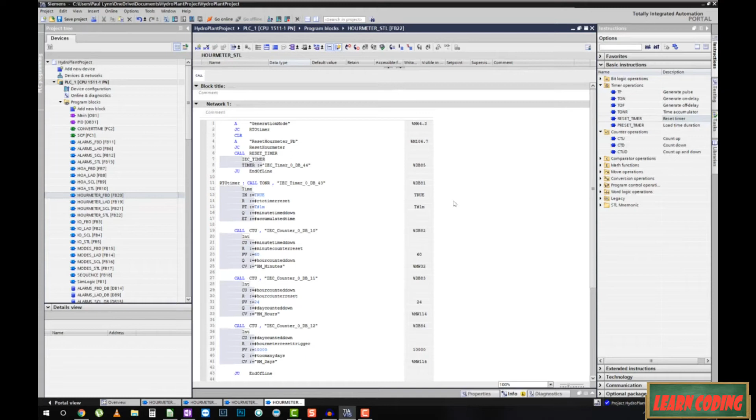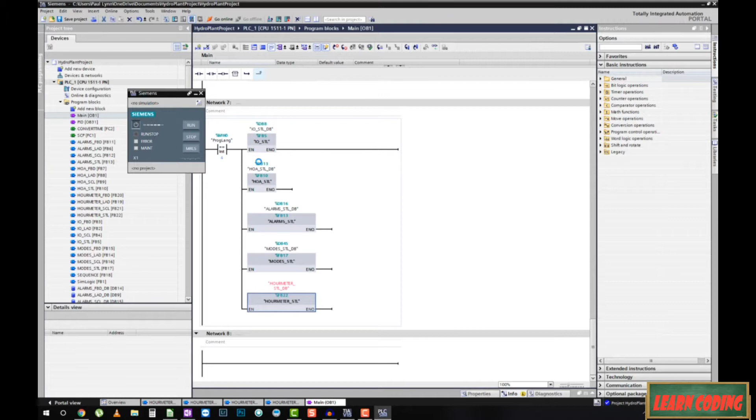First thing we need to do is go into main, and we need to simulate this. Let's start this on simulate and see if it even compiles. I'm betting it will, though. This is all simple logic, it's not hard stuff, it's really just wrapping your brain around the process. But these are the same controls we used in every other program, so it's not like we've got really tricky stuff going on, right?

Let's select where this thing's supposed to be. Sometimes it makes me search for it. Oh, come on, don't act like there's not a simulator right there in front of me. I know it's there, you're not going to convince me otherwise. All right, compile, compile, compile. Come on, you love my programming, you know it.

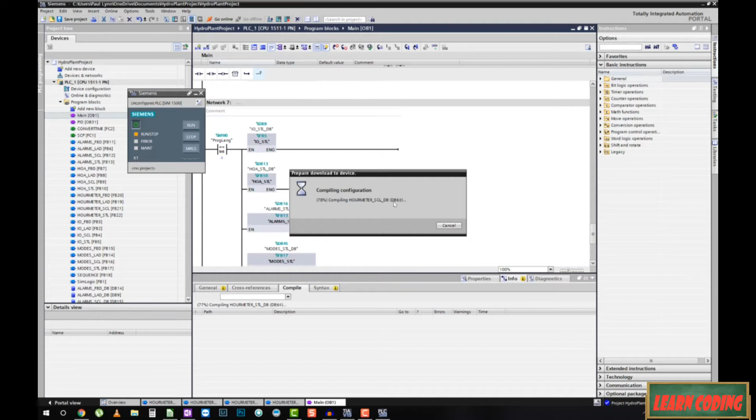My code is good, it's the best you've ever seen. Come on, show me the money. Man, do I really have that much code in here that it takes 20 minutes to compile the thing? Check, check, oh look at that. 4 hour meters coded and it compiles on first go. Well, will you look at that. Hey, I have at least learned to program for this course. I don't know if you did or not, but I at least learned how to program.

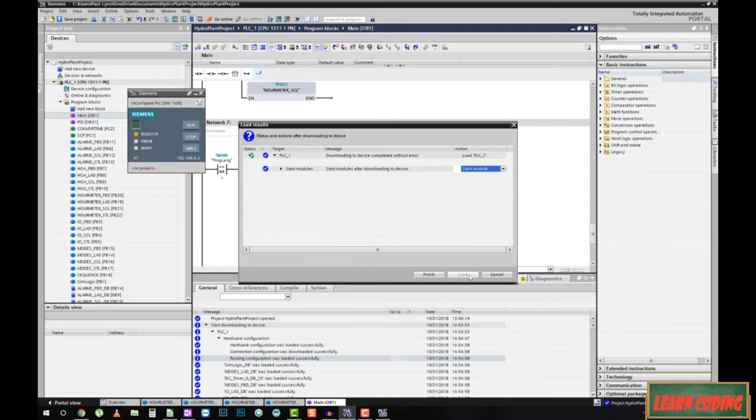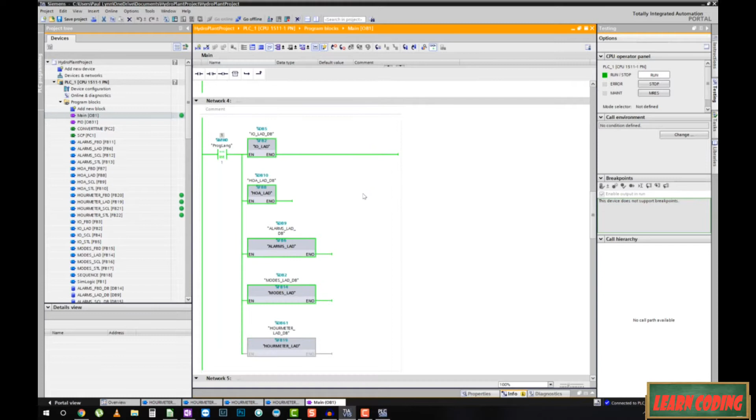Let's start that module, get on in there. Okay, so we're in main, and let's throw this thing into monitoring. Get rid of that junk down there and make sure that we're in ladders. Why, yes we are, how convenient.

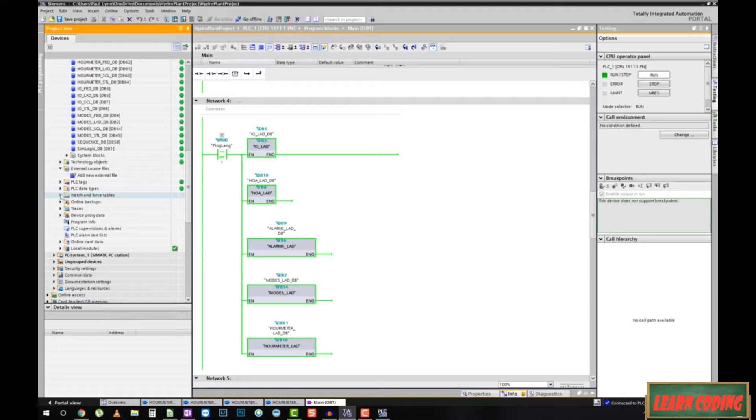Let's go into our watch table. I hate to do it, but it's one place where we can see everything all at once. And let's pull that guy up. We were looking at a whole bunch of junk when we were going through sequence. We're not going to look at as much junk, but we're still going to look at probably a lot of junk. So let's delete all that.

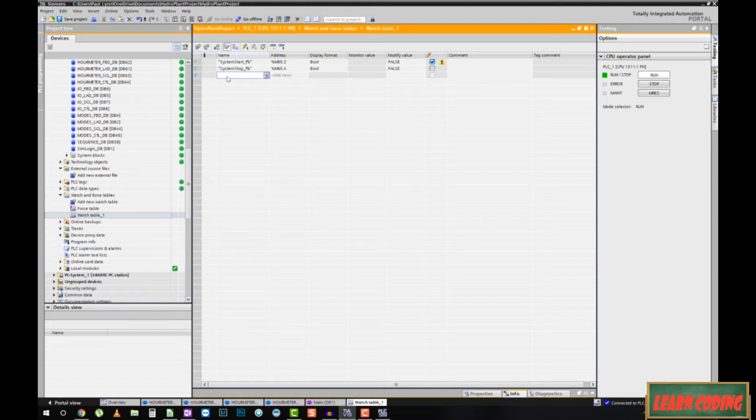Boy, is it really taking that long to just delete some stuff from a watch table? I don't want to sound like a cynic who's just got it in for Siemens software, but this stuff could really use some optimization.

Sorry. Okay, we want to check for idle mode. We want to check for warm-up mode, generation mode, cool down mode, and fault mode.

And let's go ahead and go online. So we can already see that we're in fault mode. That's a real bummer, and it's probably because our e-stop is off. Yes, it is. So we're going to need an alarm reset to deal with that. And for starters, let's go ahead and set our e-stop.

So let's send that value in. Done, get me out of that. And our alarm reset, let's go ahead and reset that alarm. Done. And set that back to false.

Okay, my finger's off the button. E-stop is on, we still have a fault. Let me guess, I've got to go through and set all my freaking settings and everything to get things running again. Well, that's hardly exciting. But what are you going to do?

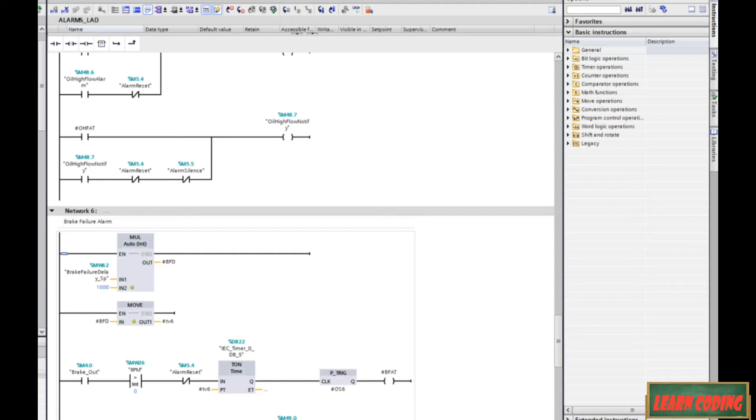Actually, what am I going to do? I could force this thing into generate mode, maybe. Let's see if that works. That's kind of a cheap way to test it, but I'd really rather not go and just set this whole thing up again. So, generation mode and true. Let's just see if I can force that. Good, okay, I'm in generation mode as far as our hour meter cares.

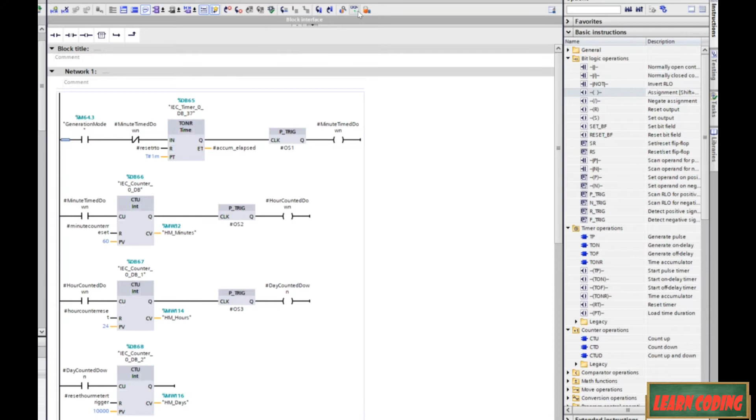And let's just delete all the rest of this, it can be in whatever error mode it wants. I'm going to look for hour meter minutes, hour meter hours, and hour meter days. All of those are 0, but I would expect that somewhere in some logic right in here, there are some seconds being accumulated. So let's come and check and look at that.

36, 37, we are accumulating seconds. And we should see those start to pop up as minutes here in another 14 seconds, and then we should see those start to pop up as days and everything else. So yay for that. And I'm going to jump over into my watch table just to see. Sure enough, we've got 1 minute there.

And I'm going to go ahead and push, let's see, I'm going to push 59 minutes into here, and I'm going to push 23 hours into here. So let's push those values.

And now, why didn't those values go when I tried to push them? That's really bananas. Oh, probably because the counters are managing those, so it won't let me push them in through here. Okay, that's fine. Let's go back into our hour meter.

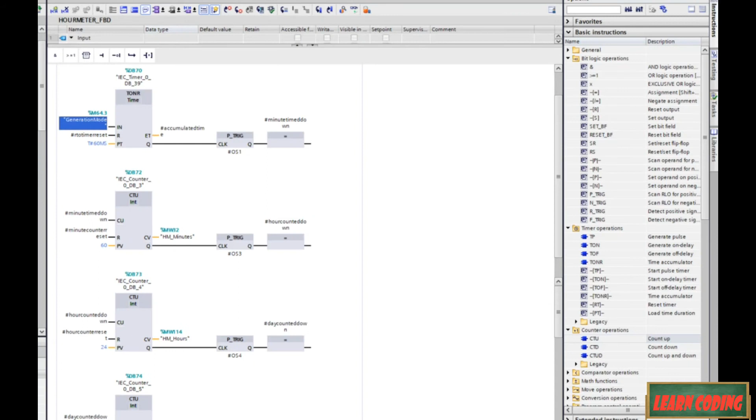Man, where did that thing go? I was just looking at it. Here it is. No? Fine, let's go the hard way. Let's click it over here.

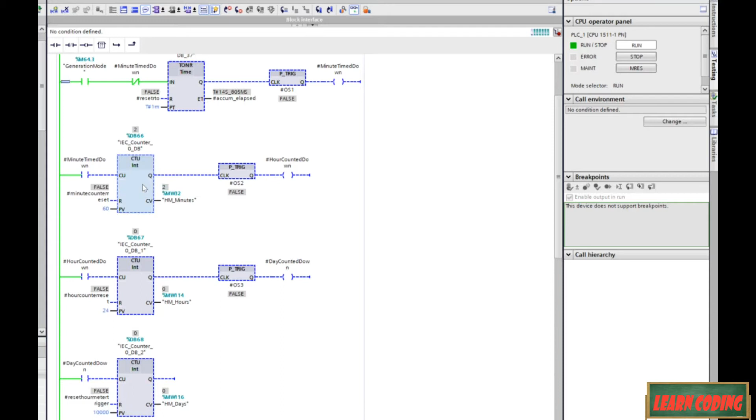Okay, so now we're back in there, and I guess there's not a way to cheat the hour meter, so we're just going to have to trust that if this counter is working and we use the exact same logic on the rest of them, that stuff's going to work as well.

So in that case, I'm just going to go ahead and check and see if I can reset the hour meter. Reset hour meter push button, and here's what I'm going to do about that. I'm going to send in a true, and then I'm going to take it right back out. So there's the true, and now I'm sending in a false, and look at that, we did not reset.

We shouldn't have. Now I'm going to leave it for 10 seconds, and we should see that 2 disappear. And come on, it's been - we don't want to see a 3. Ah, there we go. Okay, we did. We reset back to 0.

So I'm going to call that first hour meter right there working. And we're out of here. Let's go ahead and go back to main and put ourselves in our next paradigm.

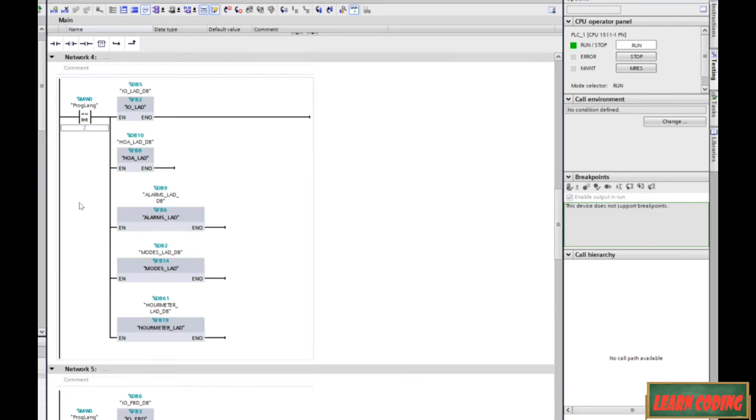So now our programming language is going to be 2. And oh man, I hit the wrong thing in the wrong place again, didn't I? This is what I needed to change. So yeah, let's change programming language int to 2.

Now we're in our function block hour meter. So we could go in here and play, but let's just deal with the watch table. And whoa, look at that. Our minutes are going crazy. We've got some timer management issues going on up in that guy.

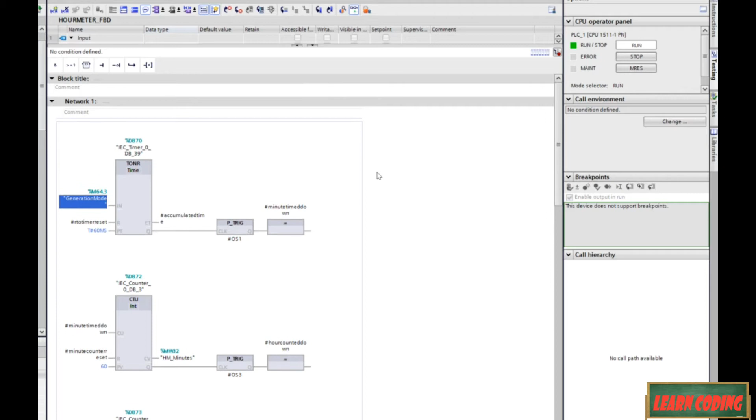So let's go in there and go online, and let's see what we screwed up. Here we go, it just took a while to load. And what's going on here? We're supposed to be counting our minute down, and it says our minute down is false. So why are we counting so fast and furious?

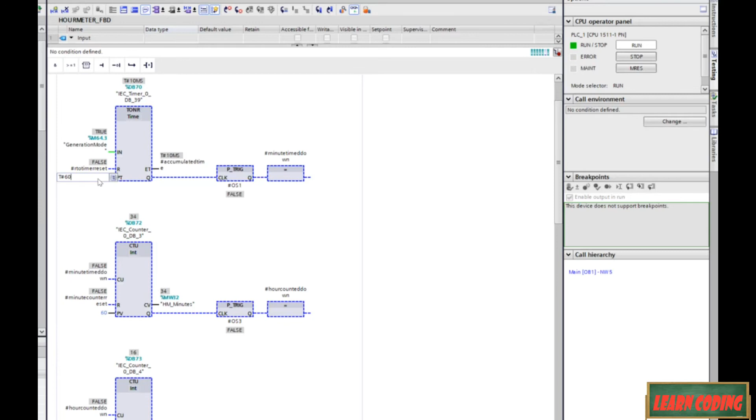Because I've got 60 milliseconds in here for the preset. All right, let's go ahead and make that not 60 ms but 60 s. You think that might make a difference? Cool, I like that. Okay, so load it, and let's go back to our watch table.

First of all, yeah, we can see that that thing's timing normally now, and we definitely know those counters work. Let's go ahead and do our test on sending in a reset and taking it back out within 10 seconds. Nothing reset. So let's send it in and leave it there for 10 seconds, and hopefully that 20 and that 19 go back to 0.

And 3, 2, 1, bang! Yes, they did. Okay, so let's go ahead and send a false in on that, and I'm just going to delete these override values here because I'm not messing with them right now.

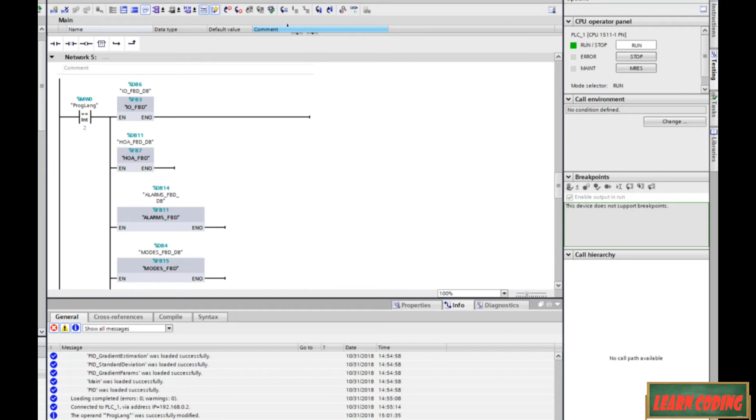Let's go into main, and let's set our programming language to 3. I'm going to call our first 2 hour meters working, and let's see about our third one.

So we're in SCL. We should be timing. It should take a minute before something shows up. We are in generation mode. Let's just go into SCL. Well, there's no point in going in there. We know we're not going to get to see anything really happening anyway.

So what can we really do but just sit out here and stare lamely at this watch table and wait for a minute to go by, twiddling our thumbs, hoping we're not just waiting in vain because the code is borked. I don't know if it's been a minute yet, but if I have to troubleshoot this, I'll change that timer and set it to milliseconds or something so we can see some action happening.

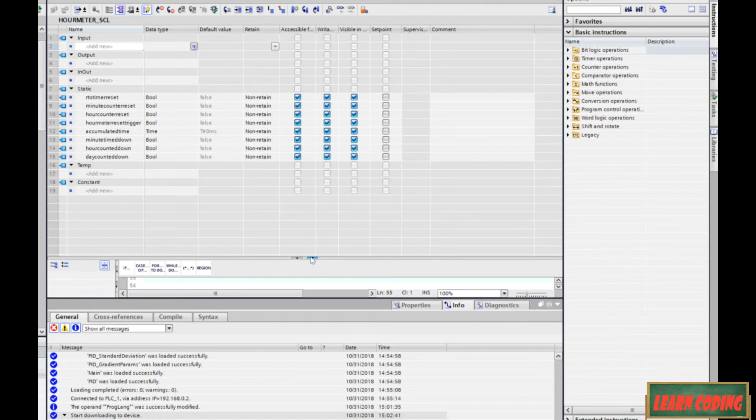Well, I'm not seeing anything yet, and I would have expected it to already have gone by. Whoops, I don't want to go into there. So, let's go into here. I would have expected something already, so let's get that out of our way and try to figure out what's happening.

If we're in generation mode, we should be timing, and going online doesn't really do anything for us. That's kind of a bummer, isn't it?

So we're looking for 60 seconds to expire if we're in generation mode. And what's our RTO timer reset? Let's go down here and see where we're calling that. RTO timer resets based on a minute timed down and the hour meter trigger.

Okay, so we're not doing that. We should be accumulating. Oh, I see what... No, I don't. If minute timed down, then we reset the timer. And then we look at our counter here, and we should be counting up on the minute timed down.

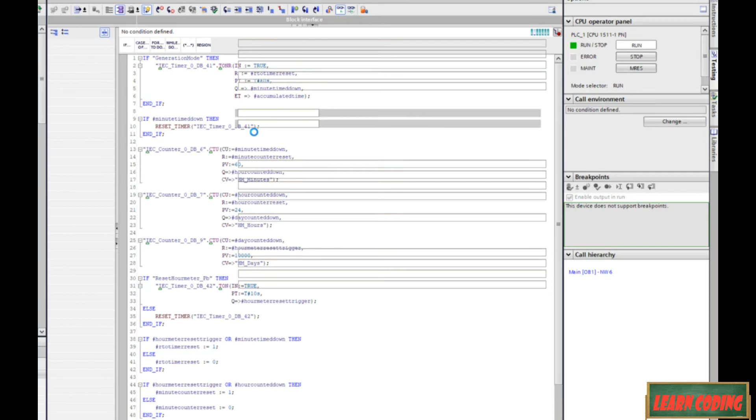And everything in here looks solid. Let's go back to main and just make sure I've actually got a call in on that. What on earth did I push to get this? Let's try that again, double click on main. Okay, there. Yep, our hour meter is being called.

Go back to our watch table. Oh, I guess we were just impatient, it wasn't a minute yet. Look, things are working after all. Okay, let's continue with our test.

Set the reset push button to true and send it in, then send in a false real quick. And yeah, it kept timing, so that's a good thing. Let's send that in and leave it for 10 seconds, and that 3 should become a 0.

And then we're going to our last hour meter. We're going to test it, get out of here, and go eat chocolate chip cookies and milk, baby. Yeah, okay, so we're out of there. Let's go back to main.

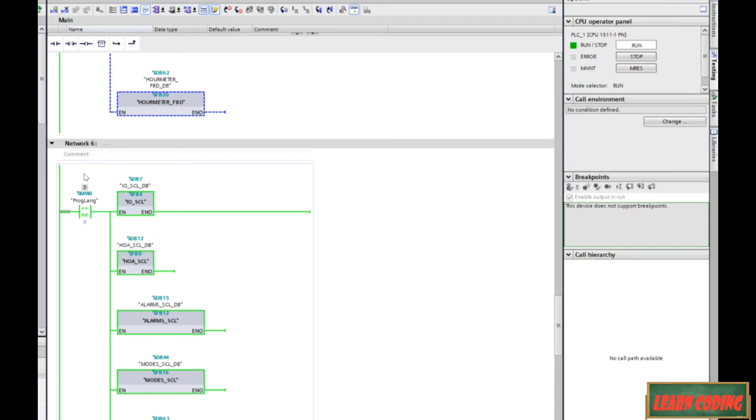And our programming language is our favorite, number 4. And sure enough, our hour meter is being called. Let's go to the watch table.

Generation mode is still true. And if we go into this one, we can actually see something when we monitor. So here we go, look at that. We can see some time happening. Oh, baby, we like that.

So this thing is at least timing. And as long as we get 1 minute, I think we know it's the same logic for all those counters, so it's going to flow down. That's not to say I might have a bad tag in there or something like that. It's just to say I'm not going to sit here and play with this thing for hours trying to make sure everything's flawless. I just want to make sure the thing's basically working.

So far I'm pretty happy with everything I've seen, with the exception of one silly little thing where I typed in milliseconds instead of minutes or seconds. We haven't had any bugs yet. So look at that, we've got 1 in our hour meter minutes. So this guy seems to be working.

Let's just test our resets. We know our hour meter, actually our retentive timer, we saw that it reset when it was supposed to, so that's even

impressive. Let's send in this true, send in a false, and sure enough we didn't reset our 1 there, but if we leave it for 10 seconds, we can call this thing finished. So we are like 8 seconds away from glory right now, and I'm about to jump up and down and do a silly dance if that thing goes to 0.

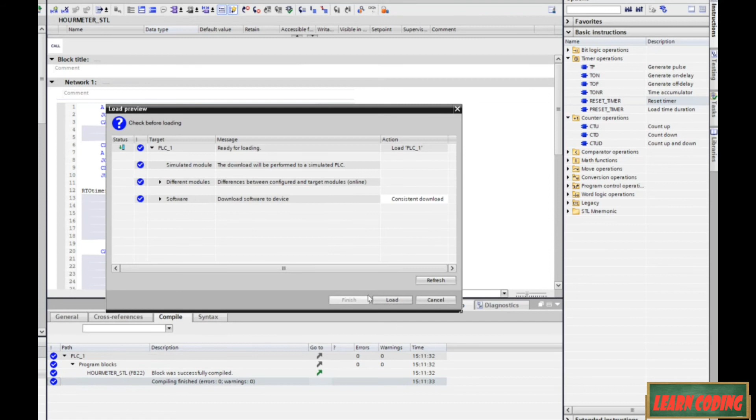Okay, so now I'm first starting off by checking my hour meter reset, and then jumping straight to reset hour meter if that button's being pushed. Otherwise, I'm resetting my push button timer, clear, and now checking to see if I'm in generation mode. I think that's what I did wrong. Not a big deal, I can live with that. If that's my only error, I can live with that. I'm not going to be difficult about this.

Okay, our button's already down, and in a couple seconds we should see that 4 go back to a 0 if I did this right. Come on now, it's been more than 4 seconds. Let's push in a 0. Ah, okay, well it disappeared now. That's weird, did I screw that up?

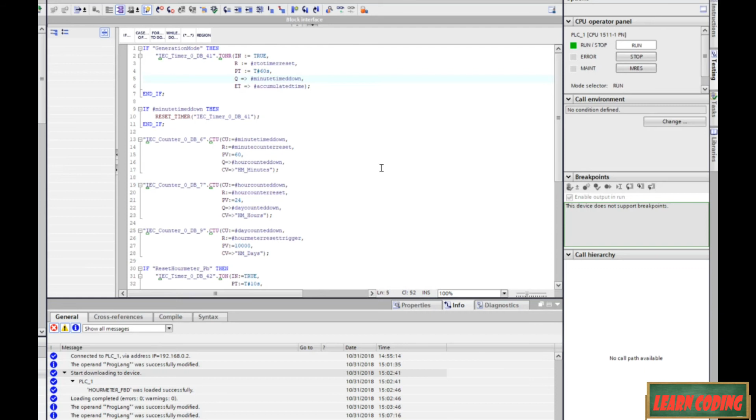Let's go back in there. That's not the hour meter I want to look at. Let's close that garbage. Here's the hour meter I want to look at. Let's get rid of this junk on the bottom.

So, all right, are we timing? No, we're not, and we should be. So the first thing we're looking for is reset hour meter. We're not getting it, so we're resetting. Are we resetting the right timer? We're resetting timer 44, and where is timer 44?

I don't... oh, okay, no that's not it. Where on earth is timer 44? Maybe that's down here and it's just hidden behind all this. Yeah, okay, that's our timer 44. We're resetting that, we want to be resetting that.

So why are we getting a jump conditional here? We're looking for and reset hour meter push button. That's a 0, but we're evaluating this as a 1, and it seems like we're jumping down here to reset hour meter, and no, that's not happening. So, okay, why aren't we timing?

We're looking to see if we're in generation mode. Are we not in generation mode? Yes, we are in generation mode. What happens if we falsify that? Let's false that up, come back in here, and I think I see what's happening.

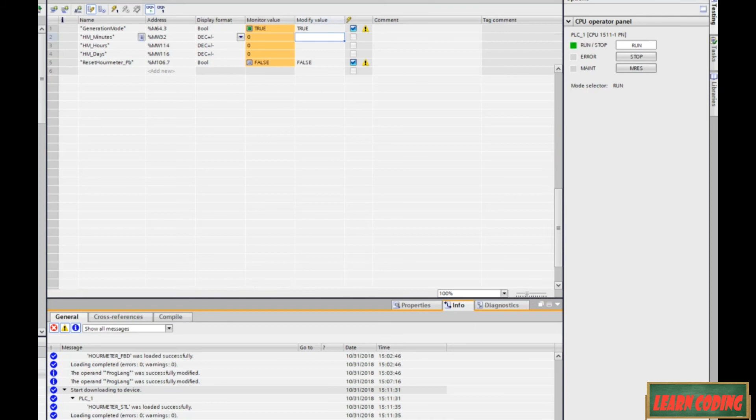Go to our watch table, generation mode. Let's put us in, and let's go back to this Hourmeter. And sure enough, it's timing like it's supposed to.

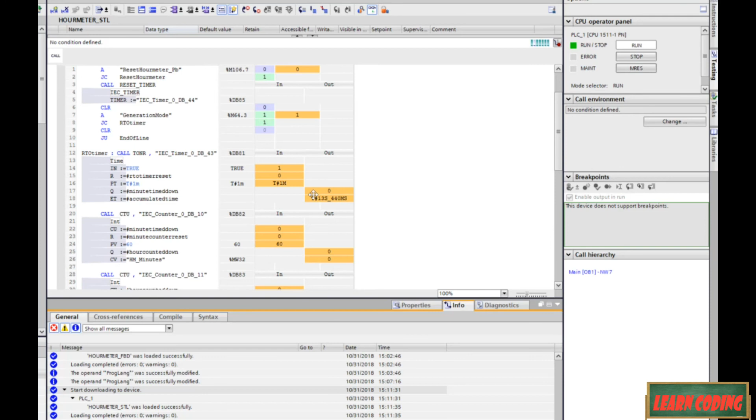We're going to wait till we've got 1 minute on here, and then we're going to try to reset this thing. But actually, I don't even think I need to, because I can look at that time right there to see if that resets. We already saw before that everything else got reset, it just stayed reset. So I'm going to push in a true and then push in a false.

Let's go back and see. Yep, 39, 40, it's still going. So let's come in here, push in a true, and then go back and watch it. So 46, oh actually no, it completely stopped while I'm pushing this button down. Then after 10 seconds, I'm guessing it's going to do its reset, but it's not evaluating this, and we need it to still be evaluating some of the stuff in RTO timer.

So that's our problem. Once again, we've got bad flow going through here. Man, I have a problem with that, don't I?

Okay, first things first, let's go back here and set this to false. And as soon as I do, I bet everything reset, didn't it? Let's go back and look. Yep, sure enough, everything resets at the end.

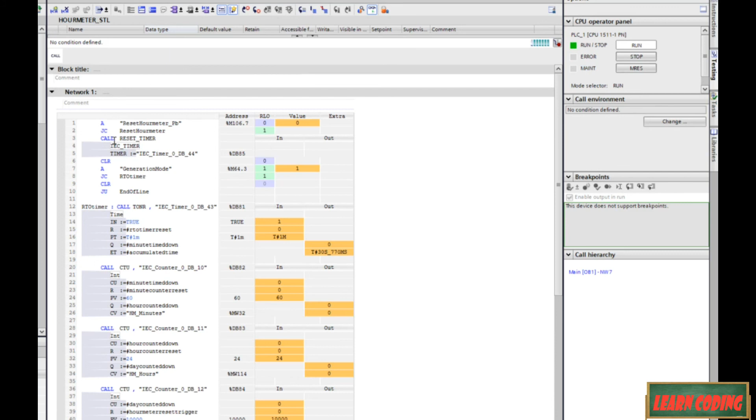I'm going to leave that there. That's good. And let's come back in here and let's see if we can get this thing fixed. Okay, if we have the reset push button, then we're jumping to ResetHourmeter, and we're skipping all of this time. Well, we don't want to skip all of that time, I guess.

So let's Control X, and let's just, what are we going to jump for? If we are in generation mode, we're going to go to RTO timer. Otherwise, we're going to jump to the end. We do still want to do that. And when we get to the end, this is where we're going to reset Hourmeter.

So we will reset Hourmeter here, and then let's steal this block from there, and let's put this in right below. And then boy, calling this end of line doesn't really make a lot of sense, so we're going to call this PB, we're going to call this reset evaluate.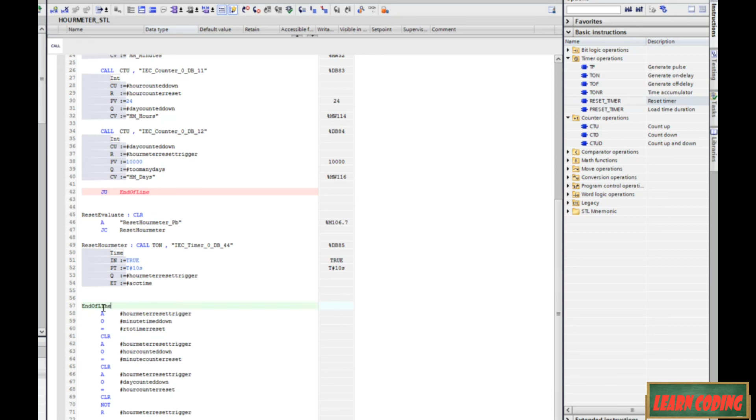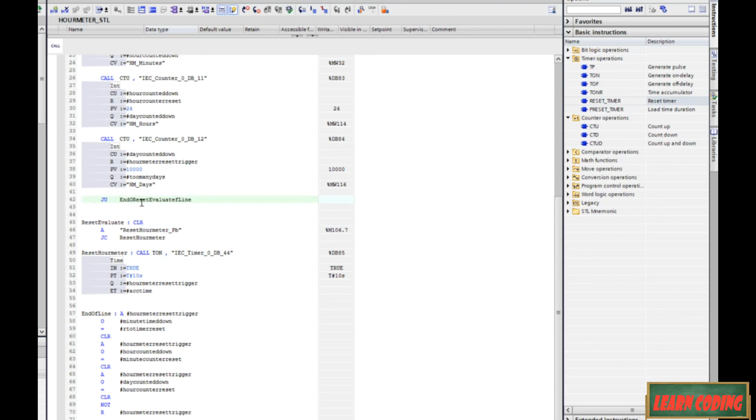Alright, and copy that, and ooh, actually I do still want end of line, so let's copy that and bring that down here. So this is going to be my end of line, and my reset evaluate is going to be this right here. So when I jump to reset evaluate, I'm going to come here and I'm going to see if my push button's pushed.

If it is, I'm resetting, then I'm going to come down here and I'm going to time. If I'm not timing, then I'm going to come down here to end of line, and I've got a reset up here that's no longer working.

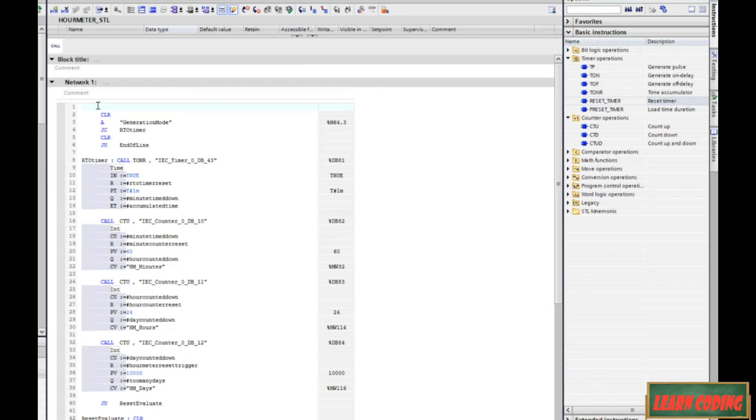So let's get that out of here, and let's just, I can even get rid of that clear. Let's get that back to the top line. And I need to put my reset in here.

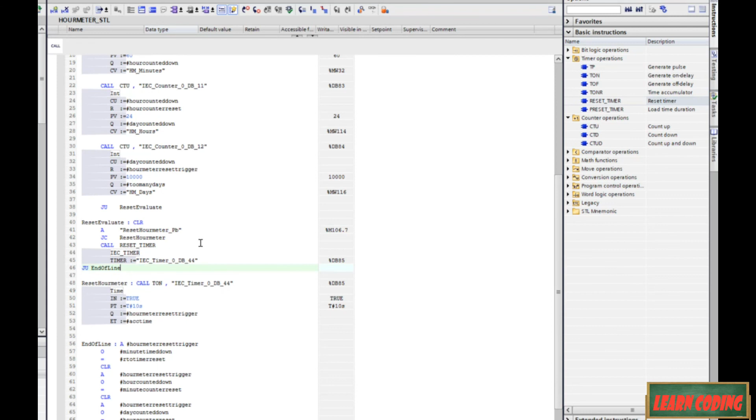So I'm going to check and say if my push button is pushed, then I'm going to jump conditionally here. So right here, I'm jumping conditionally to reset hour meter, but if I don't jump to reset hour meter, I'm going to need to reset my timer and then jump unconditionally to end of line. Ha! I feel good about that.

Let's save it. You can see I hate STL. You can see why, right? I hate it. My brain just does not think in this paradigm.

Okay, back to our watch table. We're generating. So let's come back in here and see if we're timing. We've already got 52 seconds. So we would hope to see a minute popping up somewhere. Actually, we've already got 3 minutes here. And now we just got 4. Okay, so things are working.

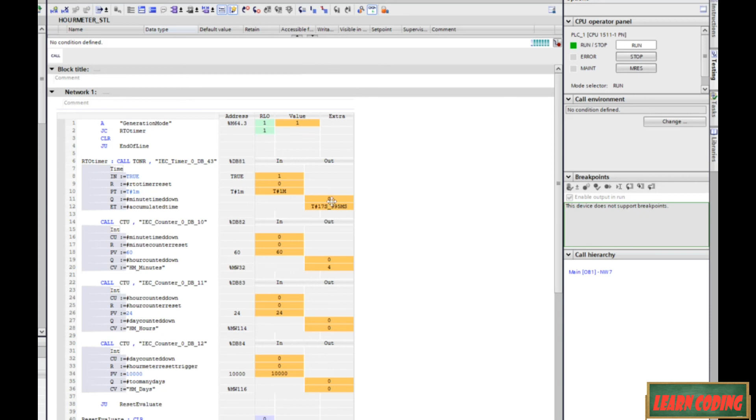Let's send in a quick true. And then we're going to send in a false. All right, let's go back in there. And we did not reset anything. And it looks like this timer right here isn't timing. So that's a good thing.

And now let's just punch this up to true. Give it 10 seconds and see what happens. That 4 should disappear. And 7, 8, 9, 10. Oh, yes! You saw it. I saw it. That thing did reset.

Nice. Let's go back in here. And sure enough, our timer is timing again. Everything got wiped. And the one thing is, it looks like this timer right here still has 10 seconds of accumulated time on it. So why is that?

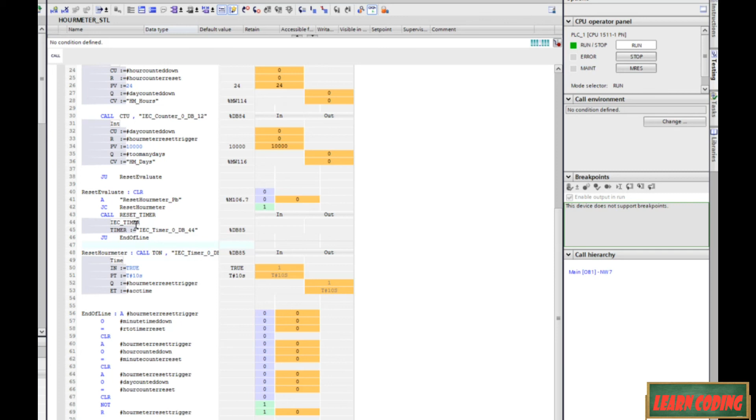We're coming down here to reset evaluate, and we're jumping conditionally on the push button, and I don't still have that push button down, so I should be coming down here and resetting my timer. And maybe that timer is just not evaluating, so it's not able to reset. And if it doesn't, I already know how to fix it.

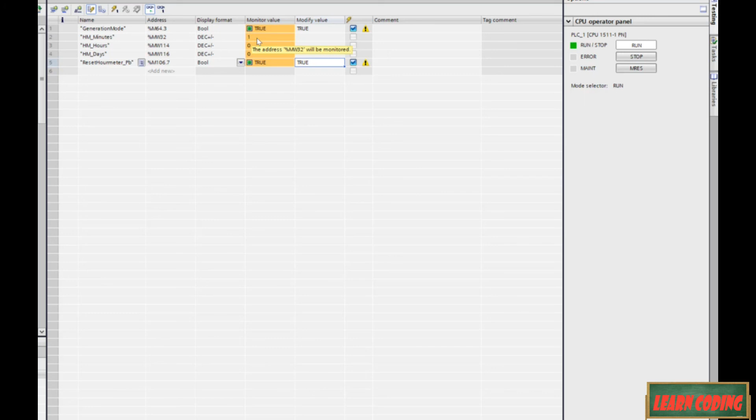So let's test and make sure that there's still a 10-second delay on here. 1, 2, 3, 4, 5, 6, 7, 8, 9, 10. And that 1 should turn into a 0. Yes. Okay, well, I thought I saw a problem. I didn't really see a problem, so yay, I don't have to solve that problem.